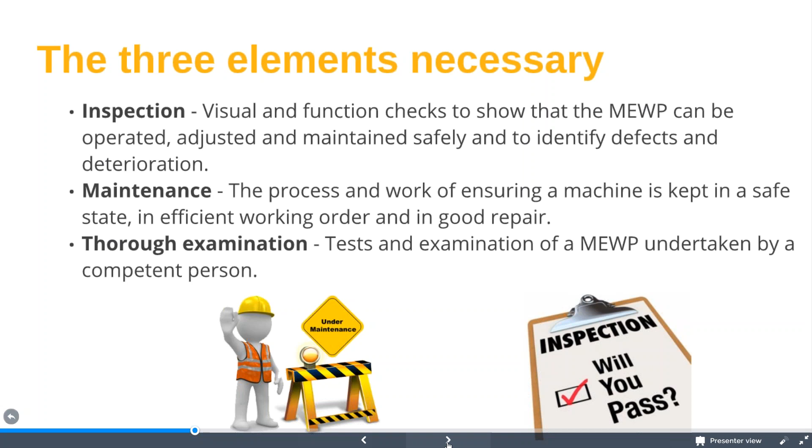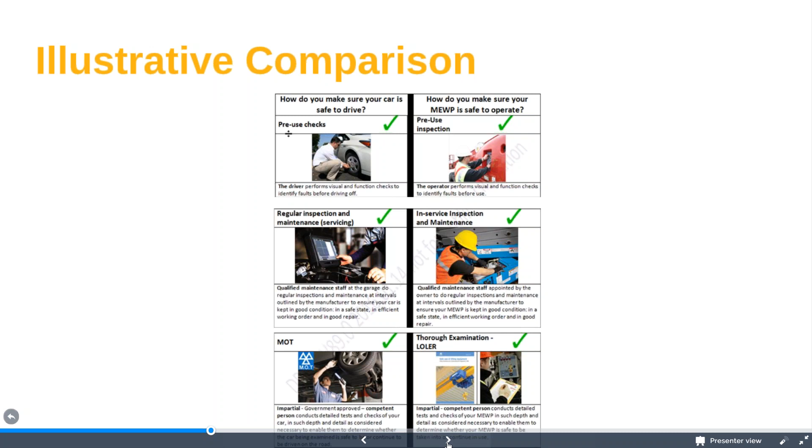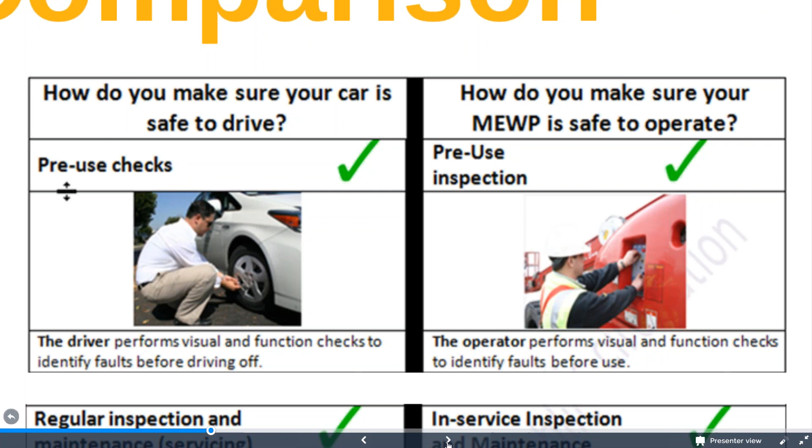Okay, so them three elements, how do we actually put them across in a simple way? So what we decided to do was to come up with this illustrative comparison. In principle, they're similar to those required if you use a car or a motorbike or even a push bike: we need to ensure that we inspect it, we maintain it, and in some cases we may need to have it examined or MOT'd. So a simple comparison was included, designed to help the reader understand the significance and differences between the three elements. With a car, we'd expect the driver to perform visual and function checks, identify any faults before they drive off, much the same as we would with a MEWP.

Likewise, with the maintenance side of things, some of us might not be capable of doing maintenance on vehicles, and modern cars you generally can't, so we have to take it to the garage. We'd expect them to be trained people and give me a machine back in a good condition, safe state, efficient, and in good repair. Likewise with in-service inspections and maintenance, very much the same as a rental company would expect.

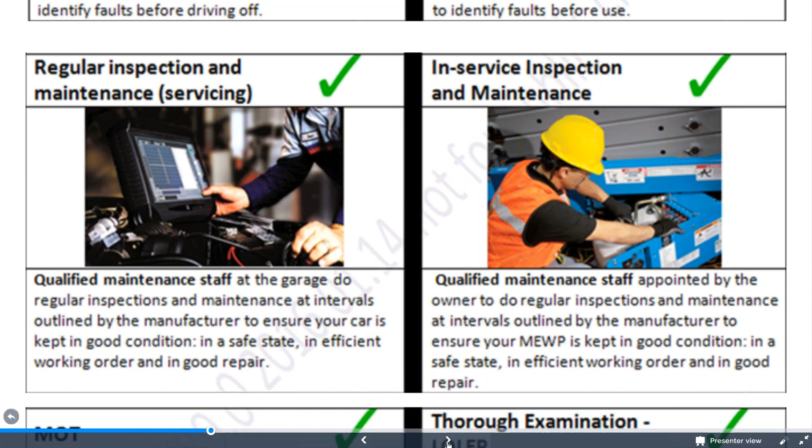And of course, from an MOT point of view, if my car's over 3 years old, I have a legal requirement to ensure that I get it MOT'd. This is impartial. We're going to have a competent person who does various tests and checks of the car in such depth and detail as considered necessary. Again, very much the same with thorough examination under Regulation 9 of the LOLER regulations. So that's why we decided to use this illustrative comparison, and I think it works. Hopefully you can see why we've done that.

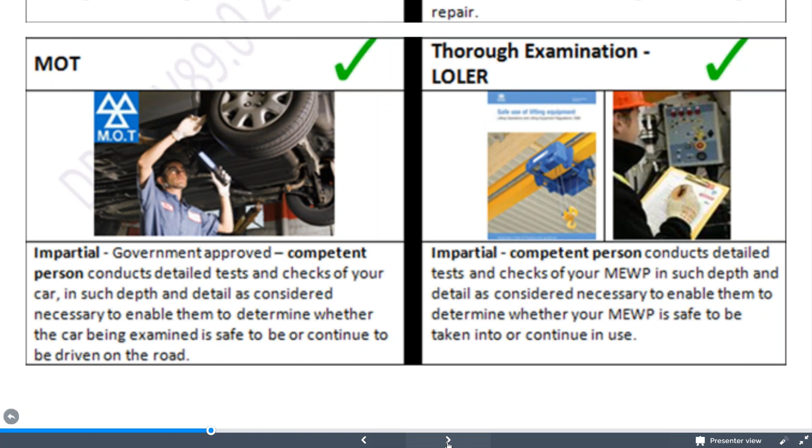Okay, the document recognised that if these are not carried out, or not carried out efficiently and effectively, it could have severe safety and financial implications for your business. So you've got to make sure these are done. If not considered carefully, the three essential and distinctly separate elements of inspection, maintenance, and thorough examination can also become blurred and indistinct, which significantly increases the risk of machine failure.

So therefore, if we do have effective procedures in place and we have cooperation between different parties, people communicate frequently, users and owners are aware of the parts they have to play, manufacturers communicate with rental companies, then we're going to be in a much better place, and we'll cover that a little bit later on as well.

All right, inspection-wise, I'm not going to go through all of them, you'll be glad to hear, but table 2 gives you a list of types of inspection, with some reference to who's responsible and what you should be doing. If I take, for example, a PDI, the MEWP owner should ensure that before any hire or use commences, the MEWP is inspected by a competent person to confirm that it's safe to be put into use or go out on hire, and it has the requisite information contained within it. So yep, happy days. That's what we expect. The operator's manual, decals are legible and in good condition.

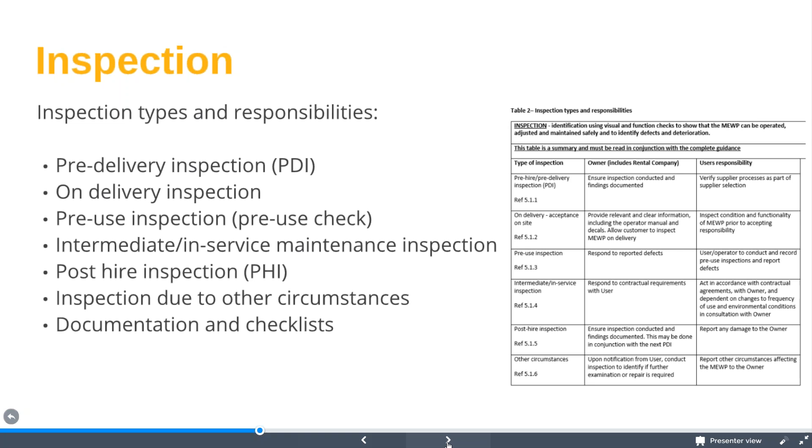Inspection due to other circumstances. So on that one particularly, where a MEWP is subjected to an exceptional circumstance which potentially could be liable to jeopardise the safety of the work equipment, the MEWP should be removed from service and subjected to a thorough examination to, of course, ensure that it's safe to return to service. I'll cover this a little bit later on, some of the examples of why we may need to bring that into play.

So we should always have a management review of the inspection records, and we would expect that this review would cover things like: is your inspection regime and frequencies appropriate? Are they being performed in accordance with the manufacturer's requirement? What does the manufacturer's requirement say? Have they changed any procedures? Confirm that inspections reflect the true condition of the machine at the time, and they're not just tick box exercises.

Have we communicated with maintenance staff? Have we got a facility there where if they identify a fault or something like that, it brings it to the fore quite quickly? So it might be a defect or wear on a certain part. If you've got one of these machines, that's only going to be isolated to that machine. If you've got 50 of them, it's going to be different. What about analysing trends to improve maintenance regimes? What's working, what's not working?

And of course, confirm that any machines found with safety critical defects are removed from use. We rectify them and re-inspect them. But of course, we've then got a duty to tell the manufacturer that things are maybe amiss with their product.

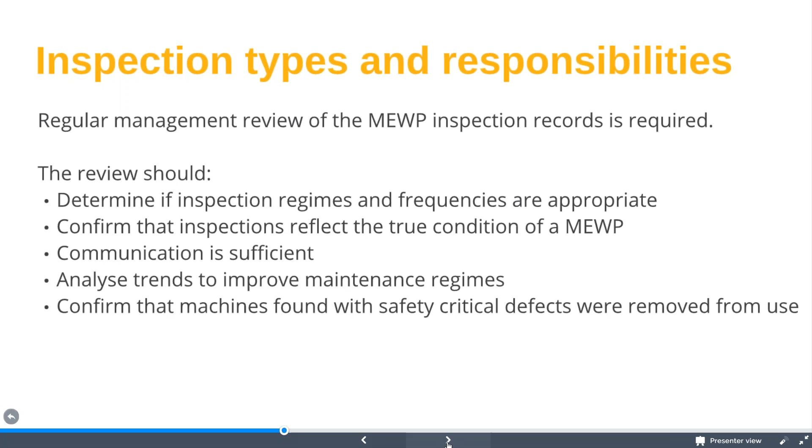Maintenance-wise, obviously maintenance is the process and work of ensuring a machine is kept in proper condition, safe state, efficient working order, and good repair. Now, for the duration of any hire, the owner retains a legal responsibility for ensuring that maintenance is carried out. Now, some of that maintenance might be us carrying out the maintenance. I'll give you an example.

For example, batteries. So if your operators are not checking batteries, you're potentially going to boil the batteries dry, and there are other risks there, explosion and fire and different types of issues with the machine. But if you're then allowing us or requesting that we come onto site to top up batteries and such, then you've got to give us time to do that. You've got to allow us access to the machine. Countless times we've had issues where we're not allowed to go onto site because the machine is in use.

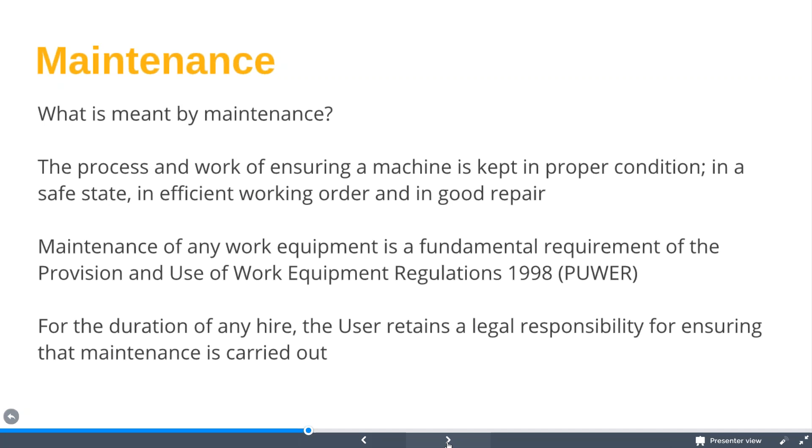How many times have you ensured that operators have carried out their pre-use checks? I would suspect it's countless times. Yet, have you ever spot checked their work? Ensured the condition of the controls, the decals, the general cleanliness of the machine, as it was when it was hired? Okay, because most companies now are going to take a photograph of that machine, and if it's not like that when it gets back, you're potentially going to get charges relating to the condition of the machine. So always make sure that you've got some sort of checking process in place.

From a maintenance point of view, the section covers the two most common types of maintenance. So planned preventative maintenance, or PPM, which essentially is intended to lower the probability of failures. This in turn will reduce the risk to the operator and others rather than the serious issue of correcting them after they've occurred. It does emphasise, though, if planned maintenance intervals are too great, the reliability and safety of the machine may be compromised. Likewise, if they're too short, we may have unnecessarily high maintenance costs.

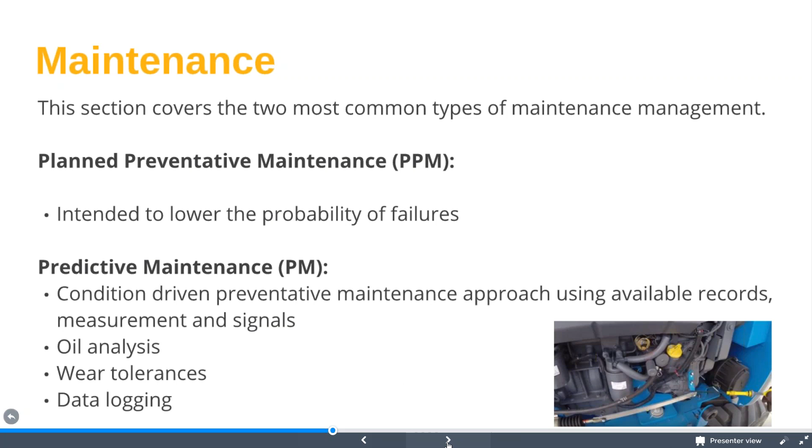Predictive maintenance, however, is condition-driven maintenance, and this is an approach that some people may look at. So this uses available maintenance records, measurement, signal processing methods to accurately diagnose individual components or machine conditions. So, for example, oil analysis, wear tolerances on wear pads and such, data logging and telematics, all these sorts of things that we can now have to actually look at parts of the machine. And you've seen systems before where the computers know it's going to fail before it fails. So it's a similar system.

Okay, design and development. Although the document doesn't specifically talk about design, it does emphasize that there is a wide variation of design and development in MEWP technology, and this makes it more essential that all maintenance information is managed effectively to be of maximum benefit.

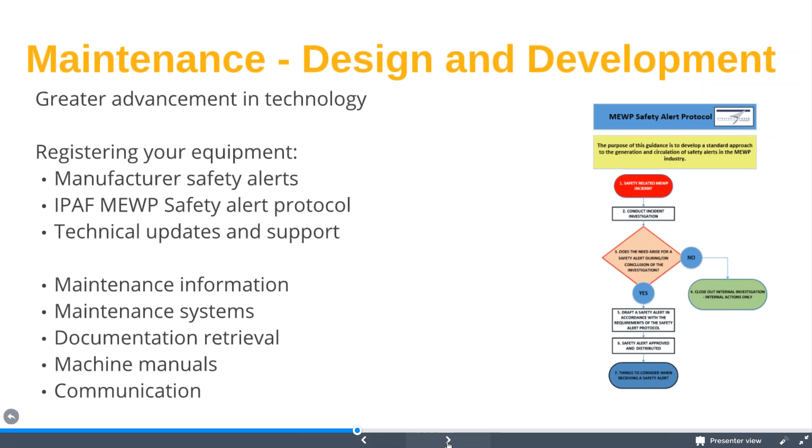So it strongly recommends that all MEWPs are registered with the manufacturer. You may buy a MEWP from somebody, we sell our MEWPs to end users, and you're strongly recommended to register that with the manufacturer, so that if anything does become apparent, you're going to receive regular safety alerts, updates and support in a timely manner.

One of the things that came out recently was the new guidance on MEWP safety alerts, and this protocol was produced by the Strategic Forum Plant Safety Group and IPAF. So it tells you what to do in the event of something happening.

I've known of safety alerts pop up for machines where the alert happened 3 years ago, and some safety managers got hold of it, put their logo on it and sent it out, and then everybody thinks it's a new alert, when in fact it was dealt with moons ago. So just be mindful of that.

It also talks about maintenance information coming in various formats, not just paper, which engineers will use, but equally electronic and digital. One of the things the document says is having the ability to store and retrieve information. With any incident or issue, the HSE are going to ask you to retrieve information, and if you've not got it in that format, you could find yourself unable to demonstrate your safety ability.

It's also essential to ensure that updates to any safety manuals, operators manuals, safety alerts and other information are communicated immediately to maintenance personnel, and any superseded documents are removed from service. So taking the old manuals out and putting the new manuals in, because manufacturers do update them. Just be mindful of that.

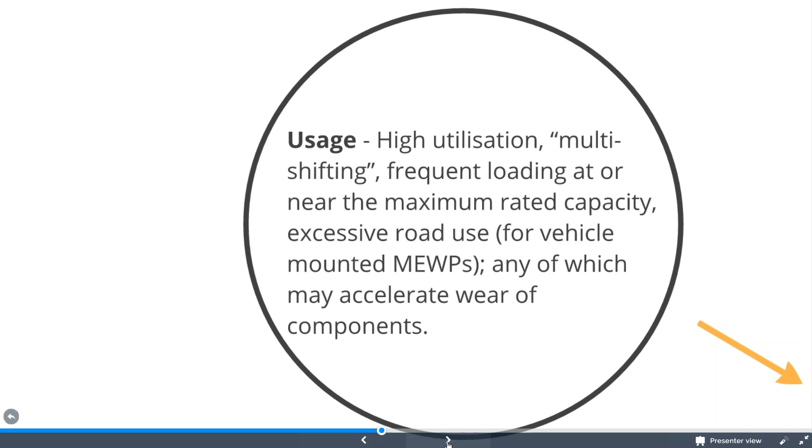But it reiterates that various factors may require maintenance to be carried out more frequently. For example, high utilization - if you're multi-shifting machines, frequent loading at or near the maximum rated capacity, potentially excessive road use for vehicle-mounted MEWPs or trailers - any of these may accelerate the wear of components. Think of your own car: if you're doing 30,000 miles a year, you're going to have it serviced more often, inspected more often, and your tyres are going to wear out. It's exactly the same.

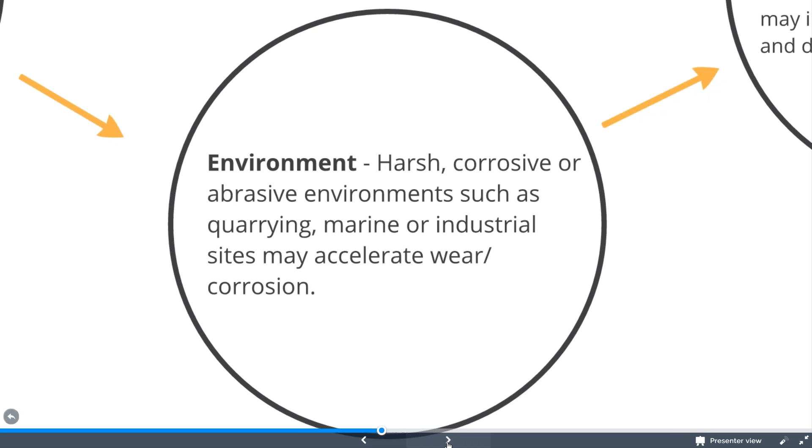Equally, the environment may be harsh, potentially corrosive or abrasive. Thinking of quarries, marine or industrial sites, you may find that certain components don't particularly work or wear very well in those situations. This might accelerate wear and corrosion. So again, be mindful that these things can happen and potentially have a big effect on the machine.

And of course, feedback - in terms of feedback, information and recommendations. So checking inspection records, looking at maintenance records. If you've got 20 or 30 or 40 of the same machine, you inspect them through examinations, and you may identify that a certain part is actually failing, or there may be a history of accelerated wear. It might be a bad part or a bad batch. So these are things you need to be mindful of.

So naturally we move on to competence, and it is good practice for a training plan to be drawn up for each person carrying out any maintenance on MEWPs.

The plan naturally should take into account previous experience, qualifications and underpinning knowledge. Persons undergoing initial training should be more closely supervised and assessed more frequently. You're going to shadow them quite closely, and after a period of time, when you're happy with their quality and consistency, you'll let them go and carry out inspections. But like anything, you're going to spot check them.

One of the things the document also talks about is where maintenance activities are performed by contracted third parties. Remember, it's still the responsibility of the owner to make adequate checks that maintenance personnel are competent and that any work they have done has been performed safely.

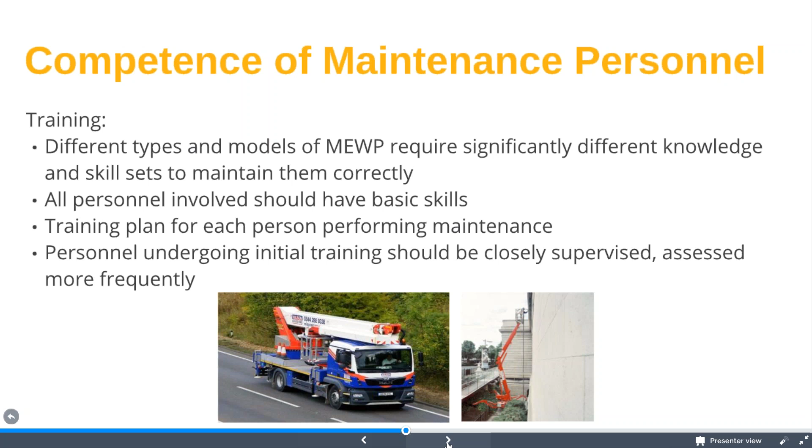I mentioned earlier about this issue, and essentially why I believe part of this document came to the front. A manager of an access plant firm has been sentenced to 2 years imprisonment for his neglect of health and safety obligations that led to the death of one man and caused serious injury to others. After the trial, which lasted 16 days, the manager was found guilty of breaches of health and safety legislation and sentenced to the maximum penalty of 2 years.

I do believe that maximum sentencing penalty is going up, so just be mindful of that. Back in 2012, so this guy's had 5 years essentially to get ready for this incarceration, two men were in the platform of a truck-mounted MEWP. They were removing netting from the facade of an office block when the third main boom section buckled, causing the platform basket to fall 28 meters, approximately 92 feet, to the ground. The result was, unfortunately, one man suffered fatal injuries and another person was injured.

They were advised by the manufacturer following an earlier incident in May 2011 involving the platform, after which the company had instructed repair to the damaged section of the main boom. The repair had been incorrectly carried out, and as a result they had subsequently failed in their duty to carry out an adequate thorough examination of the platform. They had been advised by that manufacturer to replace the damaged boom. Instead, they chose a much cheaper repair that left the boom in an unsafe condition.

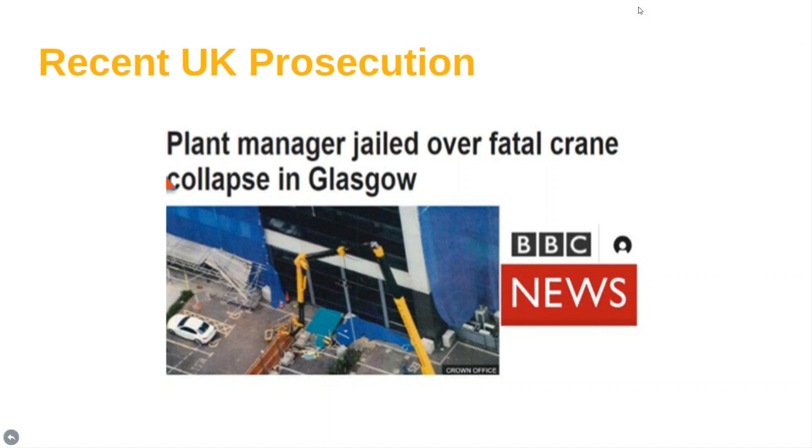Competence of maintenance personnel. Naturally it's going to be apparent that different types and models of MEWP require significantly different knowledge and skill sets to maintain them correctly. So it's essential that the maintenance of MEWPs is always carried out by people who have been assessed by their employer, and we're going to be looking naturally for people with adequate knowledge, training, skills and experience.

So what we would expect of a person carrying out maintenance inspections on that potentially could be significantly different to what we'd require of them. Have we sent them on manufacturer's courses, because there are totally different things inside them.

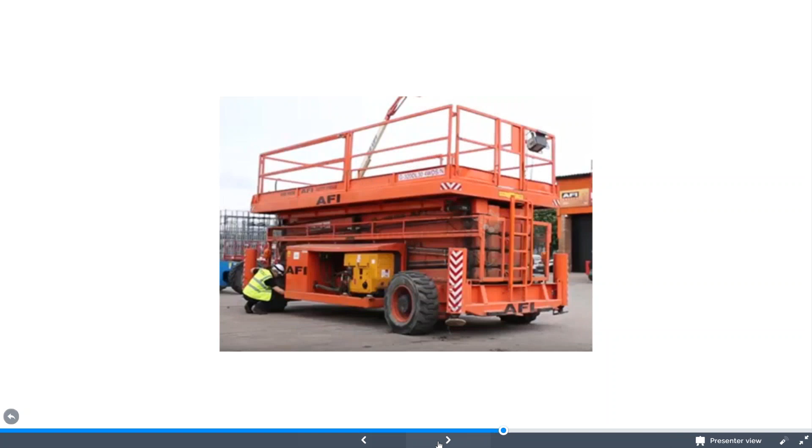Okay, so it also explains that CPD is important, because updating knowledge and improvement of maintenance personnel skills throughout their working life is essential. Like anybody in a competence-based role, they've got to maintain the competence and understanding of technical advances.

I'm sure many of my peers in this industry will remember boom superstructures mounted on large vehicle chassis, yet today we can see the same working heights being achieved with the same size boom on the chassis of a van. Materials are getting lighter, stronger, much more technical advances in manufacturing, new techniques being developed, and a much stronger reliance on electronics, computers, and telematics these days.

So, from a product knowledge base, we've got to make sure that this is essential, that people are doing this both in their basic training and as part of their CPD for maintenance. Remind you, of course, CPD is a joint responsibility between the maintenance person and their employer. It should be documented and part of the individual's personal training and development plan.

Okay, thorough examinations, LOLER Regulations 1998, which I will read out: examination, which may include tests of a MEWP undertaken by a competent person in such depth and detail as considered necessary to enable them to determine whether the equipment being examined is safe to be taken into or continue in use until the next scheduled thorough examination is due.

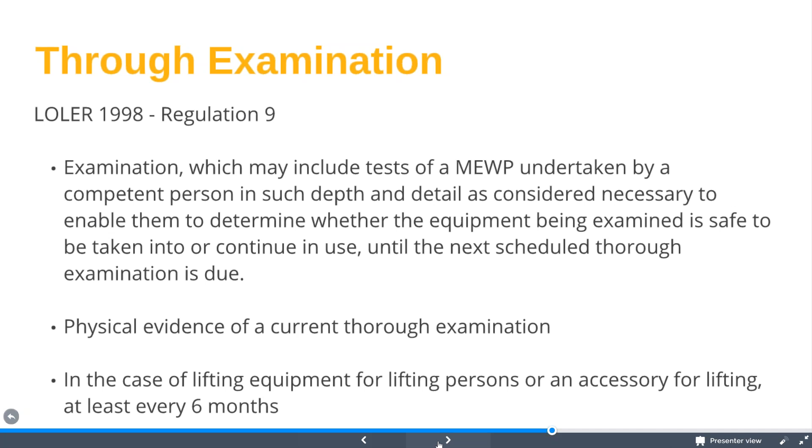So often we'll expect, or you will expect, physical evidence of a thorough examination on the MEWP. And in the case of lifting equipment for lifting persons or an accessory, this must be carried out every 6 months.

Okay, from a thorough examination point of view, one thing to point out: thorough examination is not part of a maintenance regime. It should never ever be viewed as a substitute for a maintenance program. So just because it has a thorough examination doesn't necessarily mean that it's been maintained properly, and vice versa.

So it is the user's responsibility to ensure that thorough examination has been carried out for any MEWP which is under their control. We need to monitor the expiry date of the report, and we need to ensure that we have evidence of that thorough examination before the machine is put into use.

Most rental companies, as an owner, will monitor the expiry date of the report of the thorough examination, and we often contact our customers or the user to tell them that it's about to expire. We will remind them of their legal duties. They cannot use it after this date, and yet even we have been to site after the date has expired to find the machine still in use.

So we now even have the ability to have equipment and software which can be installed on the machine and the MEWPs to ensure the machine cannot start if the thorough examination has expired.

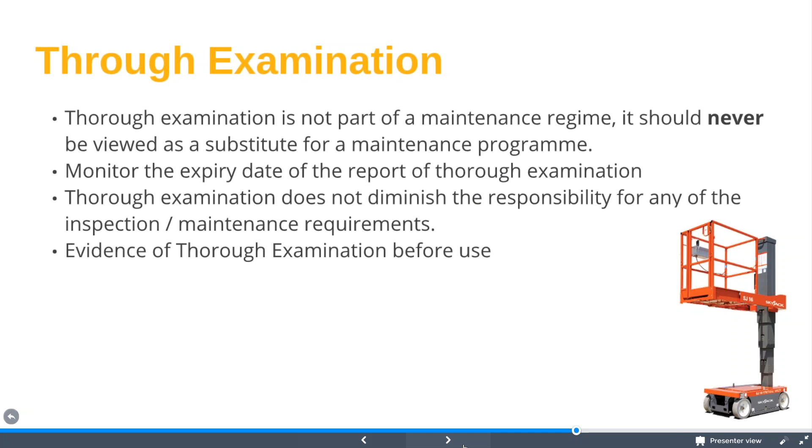Users can arrange by contractual arrangements for the owner to organise thorough examinations on their behalf, but at all times the user remains and retains the legal responsibility for ensuring that thorough examinations are carried out.

Okay, as you would expect, there are different types of thorough examinations. I won't go through all of them, they're in the document explaining what they are. A good example is initial thorough examination. In the case of new equipment, the initial thorough examination is considered to have been carried out by the manufacturer or supplier and confirmed by the date on the specific declaration of conformity. That declaration of conformity can last up to 12 months from its date. However, the important point would be the date at which the MEWP is first put into service for the first time.

Thorough examination after exceptional circumstances - so why would I re-examine the machine? Well, it may have had a collision with a structure or another machine. It may have been involved in particularly arduous duties, environmentally wise. It may have had a failure in a certain part.

It may have been overloaded or turned over, some overturn. One of the most common ones that we sometimes get is where the MEWP has been modified by the user, not by the owner. So it's had an unauthorized modification. And one common one that we used to get quite frequently is where you get a user or the operator will drill the guardrails to add some type of lifting device so they can bolt something on.

You've essentially weakened the platform in some cases, and you'll probably find in situations like that, you may have to be billed for a new platform. The machine's out of order for a while, so there could be a few issues there.

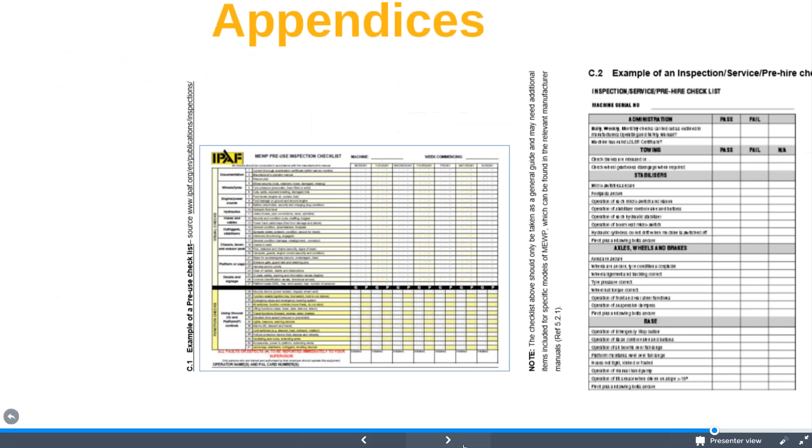Okay, within the document, as you would expect, there's a few appendices, tables and whatnot, just really to make your life easy. Those of you that don't have a MEWP pre-use inspection checklist, there is one inside the document, freely downloadable from the IPAF website. It's quite well used, and I would suggest that you could use that without much concern.

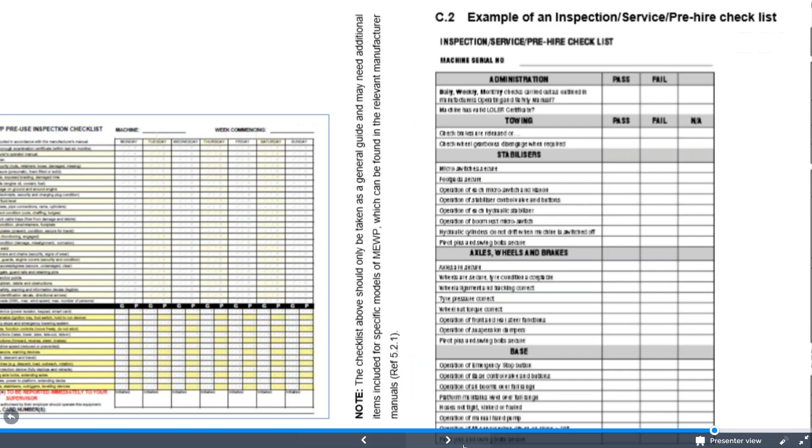Example of an inspection service pre-hire checklist. You can see there. Okay, it's not in focus. When I scan these off the document, it doesn't always take it because of the quality of the scanning. But as you can see there, administration, towing, stabilizers, axles and wheels, base. That's just an example. That list goes on and on.

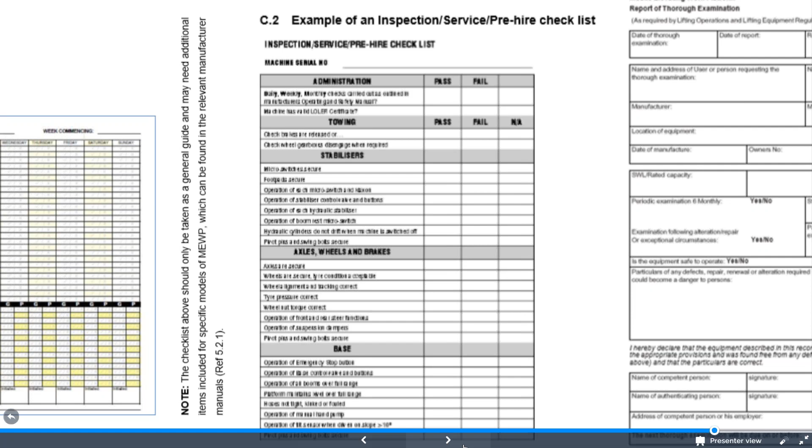Okay, and of course, last but not least, an example of a MEWP thorough examination record. So report of a thorough examination. So these are all things that you can have that will make life a little bit easier. So if you're ever needing something like this, you've got this within the document.

Okay, to just summarize the main points, we've gone through these 3 elements. I've explained why the illustrative comparison was put into place. We've looked at managing the approach and different types of inspections and responsibilities. Of course, maintenance. And then we've looked at competence and this new element of CPD, making sure that we have people who've got continued professional development. We've then looked at thorough examinations and the different types and when we can bring in-house examinations. And of course, latterly, reviewing of the whole process.